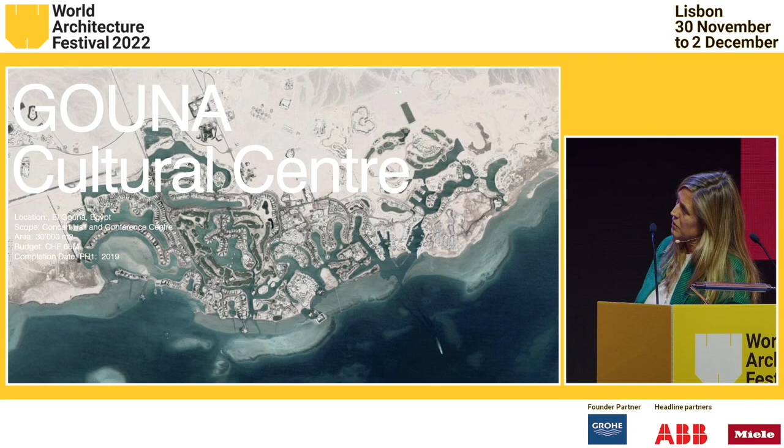El Gouna was the same client, develops cities rather than buildings. Kindly enough, he gave us another concert hall to do in El Gouna.

We were asked to essentially come up with a brief for a cultural center, but we wanted to do something that would connect all the different Old El Gouna and New El Gouna and all of these different areas, so that people, when they're driving around or walking around or bicycling around, will come by this element and by this cultural element.

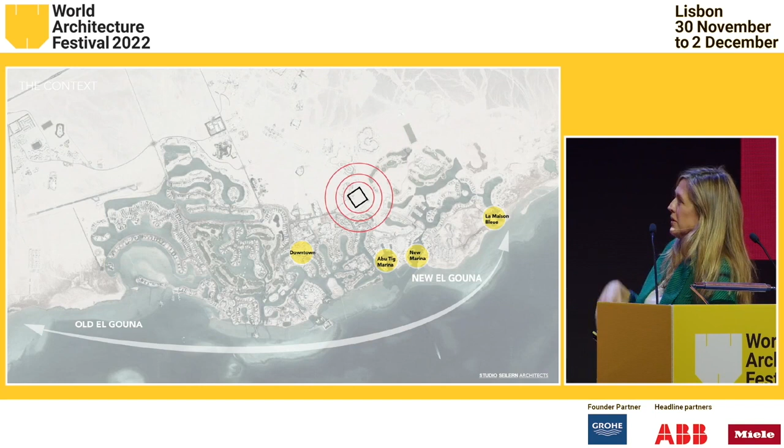We didn't want to come with our Western mentality of this is what a concert hall should look like, and we really wanted to do something that felt uniquely Egyptian and yet was not mimicking Egyptian architecture.

This notion of scale, and the scale of the sculptures and the scale of the colonnades that they have in Luxor is quite something, and we wanted to play with that, and with the simplicity of it all. I mean, if you think of the pyramid, the simplicity of their architecture is something that we played with.

And the other thing that was interesting is that the arch is a Moorish invention, a typology that's been used over the centuries, and it's something, again, that we wanted to play with.

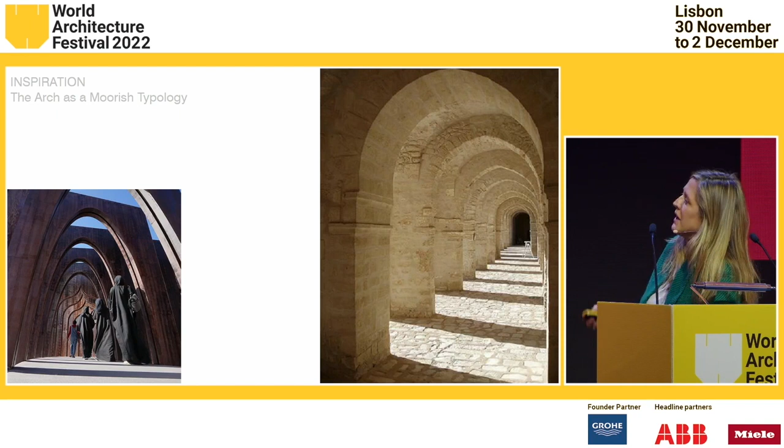We put the building in a 30,000 square meter body of water, which is all gravity fed, so no pumps, because we are in El Gouna, the city of water.

And then essentially we covered the concert hall in yellow, the conference center in blue, and the outdoor film festival area. And then we created these colonnades around the building.

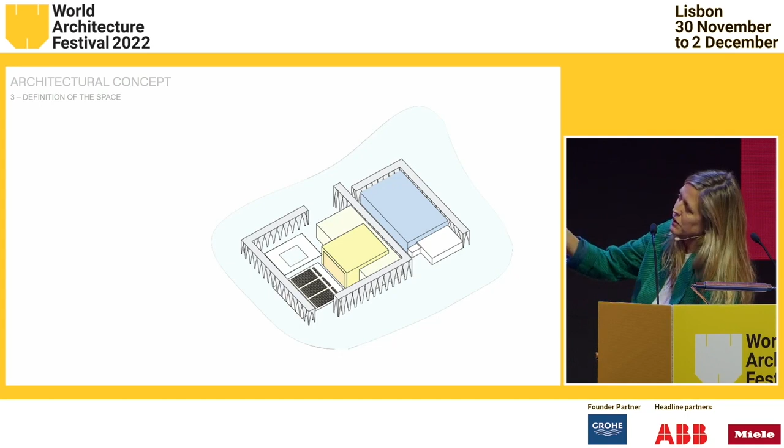And that was simply to create two things: to create sunshade and protect the buildings from the strong winds of El Gouna, but also to be able to build this in three different phases. Phase 1 being the colonnade, phase 2 being the concert hall, and phase 3 being the conference center.

But there's this idea that it becomes a public square that can be used all the time, for festivals and outside for weddings, for you name it. So it had to be something that was usable and flexible and also have the high values of culture and music.

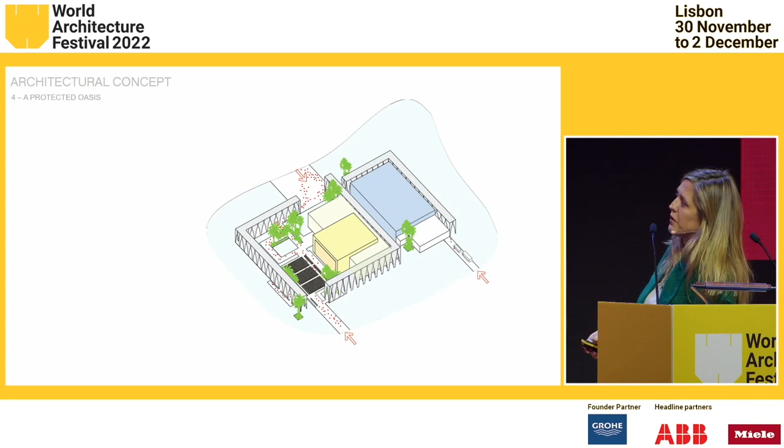We were appointed in January and had to complete phase 1 by September, so it was incredibly quick. We had to design the concert hall, the conference center, and the colonnades all and build it at the same time. But we thought, how can we reinvent the colonnade?

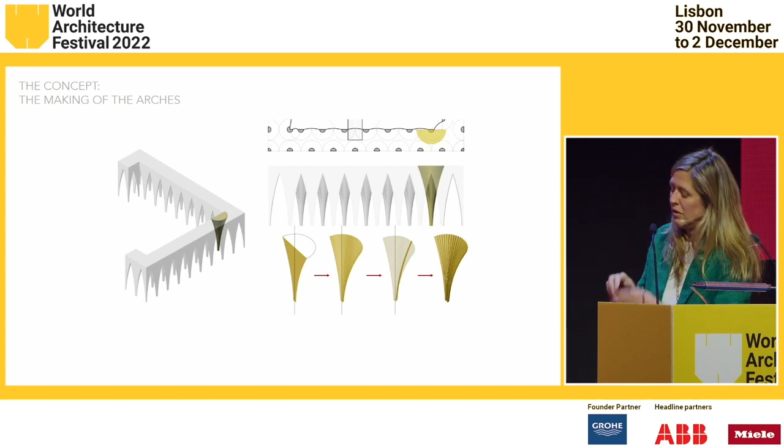And what we did is a very simple move of taking columns and just staggering them and then arranging them to find a new typology for these arches.

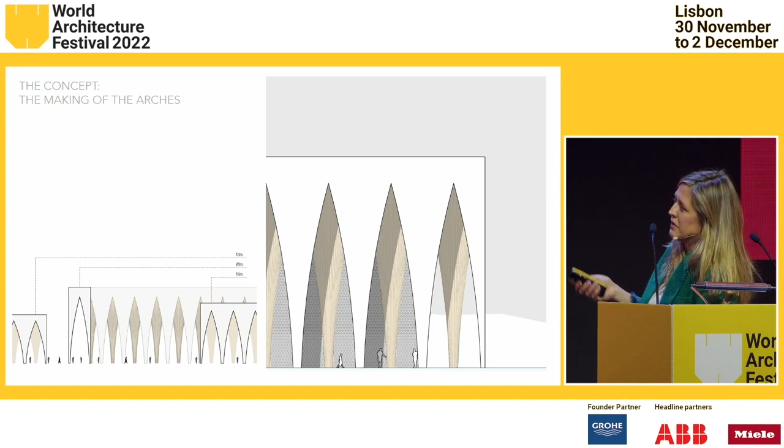And then we played with the scale, and we played with the scale of Egypt, and we amplified them to 20 meters and 18 meters, etc., giving this sense of a uniquely Egyptian scale.

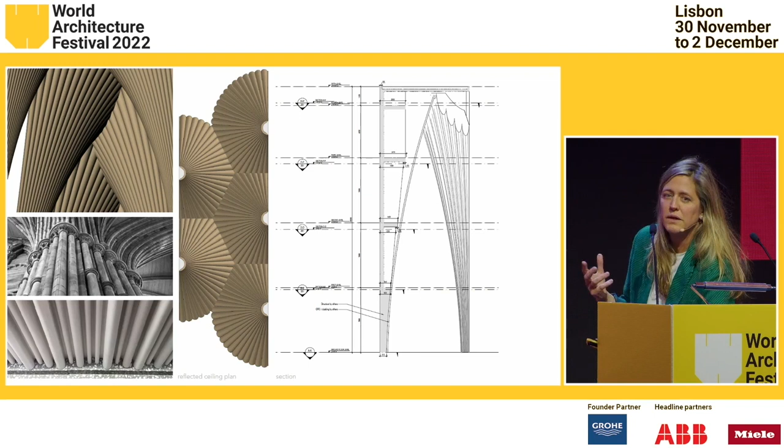But we were also very keen that it shouldn't be too monumental. It should have a softness. It should feel that it comes from the sand, from the area.

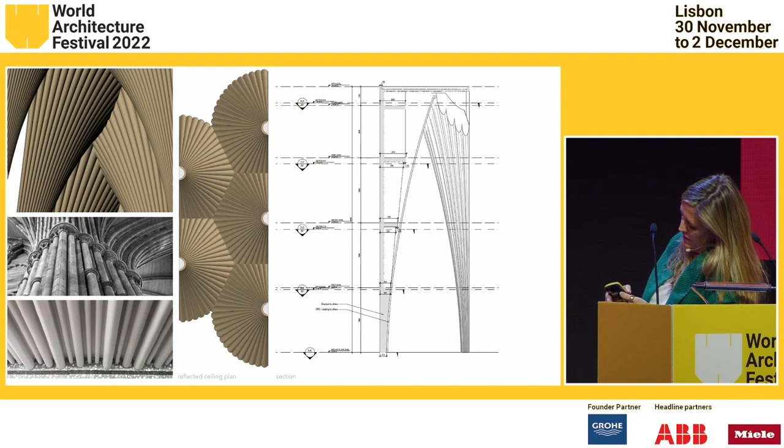And so we created this interior, and you can see in the middle view, once you stagger the arches, it creates a very complex geometry. So we had to come up with geometry that would be able to be built and yet absolutely flawless at the top. You can see how we developed it.

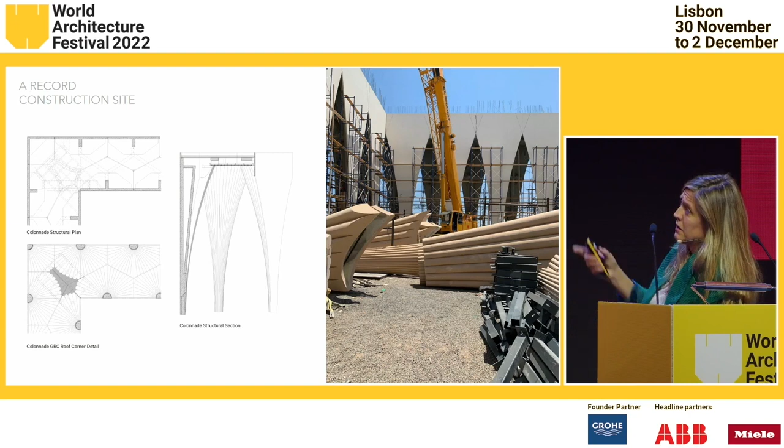This is on site. These are the GRC, glass reinforced concrete panels that we installed. You can see here the scale—that's me next to one of these panels. And they did an absolutely beautiful job of building them with absolute flawless connection in between.

But this softness of sand gives the feeling that you are in, like, a cave in the middle of the desert. This is the plan, with the 30,000 square meter reflecting pool around it.

One of the reasons we chose this site was that it was next to the Nubian village, which is where a lot of the workers live. And actually, I think it's one of the prettiest villages in all of Gouna.

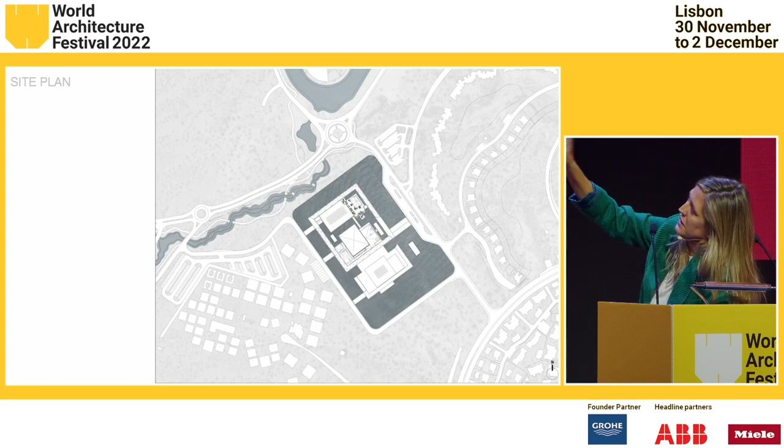More importantly, it was next to this body of water, and we wanted to take the water, flow it through our building, through our plazas, and then reject it again without the use of any kind of pumps, allowing it all to be gravity fed.

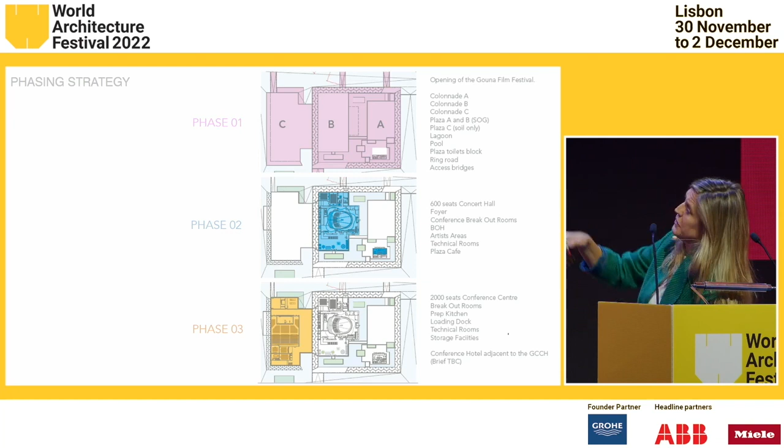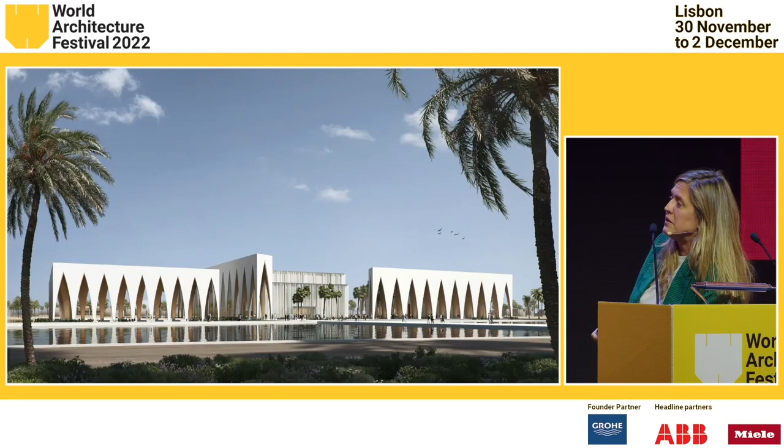These are the 3 phases. You can see phase 1 completed, phase 2 now the concert hall, which I'm going to take you into. We designed the plazas essentially to receive these future buildings, so they can be built easily once they're ready. These are the early renderings.

This is a concert hall building. We were using a local Egyptian stone. They love concrete, and we were trying desperately not to use concrete. We found an Egyptian stone that if we CNC'd it was actually more cost effective than concrete, and that was a great way to be slightly more environmental.

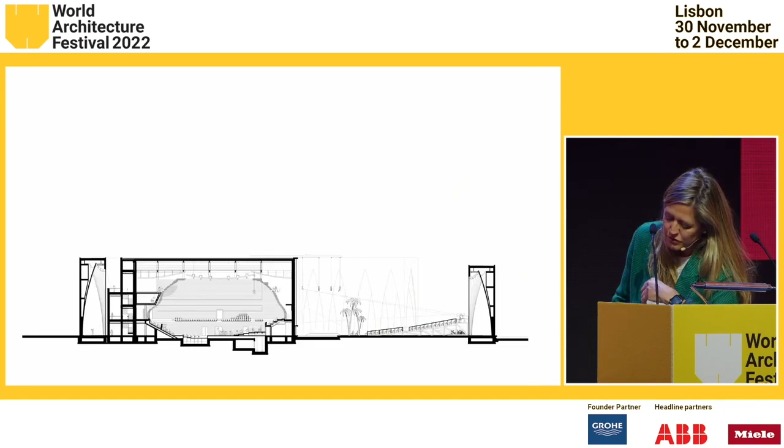Now the concert hall. The concert hall was actually completely opposite elements. The client wanted a 125-piece orchestra so they could play Aida and some big pieces in there, but only an audience of 600. When you have a 125-piece orchestra, you usually have an audience of 2,000 because it just doesn't make sense. So most large concert halls have large audiences.

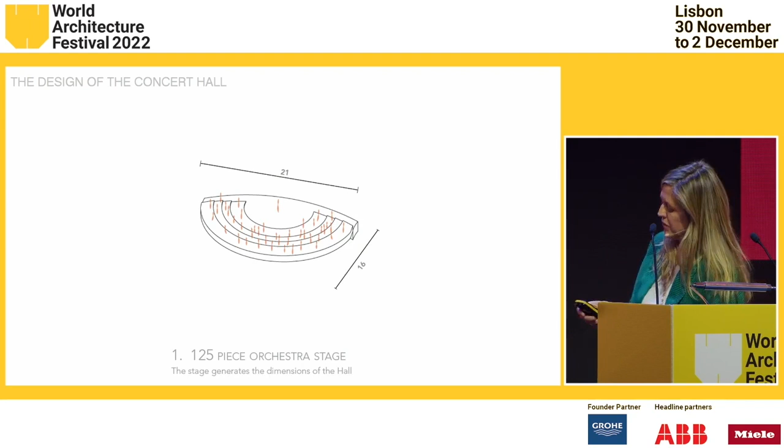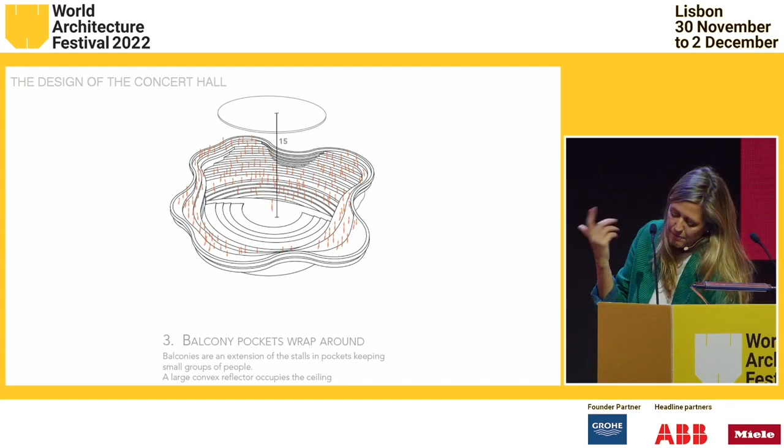So when you design a concert hall, you start with a stage, and you design the stage, and place your instruments, your musicians on it, and you size the stage, then you start building the audience around it. Like Scharoun, and like Andermatt, I wanted to wrap the audience around the orchestra, so you have this very intimate connection. Because 600 is not a big audience, we wanted everybody to see each other and feel part of the same element. Then we put the acoustic reflector above the orchestra, as you need to.

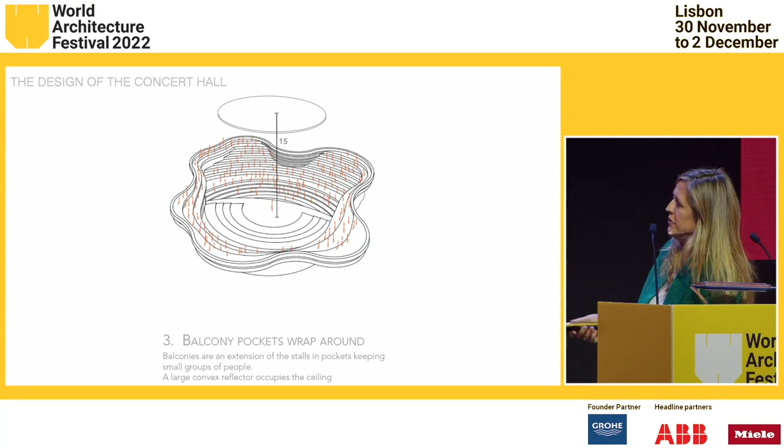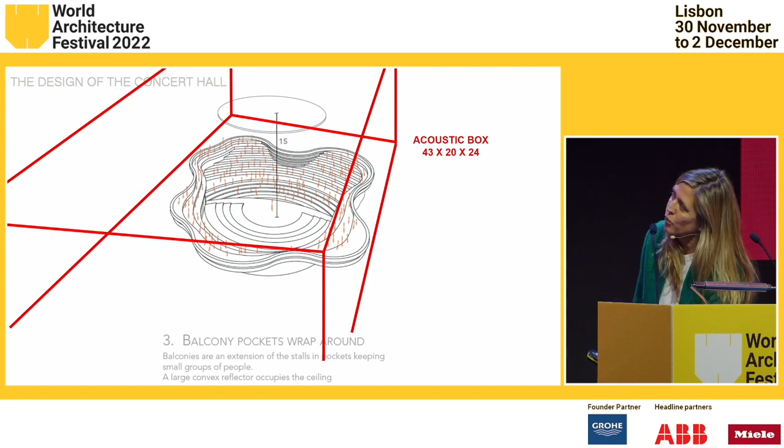The problem was that the acoustic box, the shoe box that worked so well for acoustics, 43 by 20 by 24, would have totally overwhelmed the audience. It would have been like sitting in an IKEA box while this orchestra was going on. So it just didn't feel right.

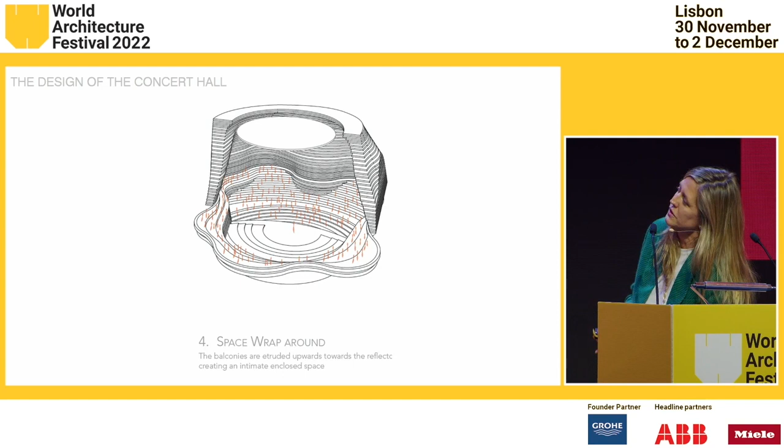So our solution was to create what we call the Intimacy Dome. The Intimacy Dome is completely acoustically transparent but visually solid, and it allows light and sound to go through. More importantly, it compresses the space into a much more intimate space that allows this relationship between the orchestra and the audience to occur without the feeling that you're in this big dark box.

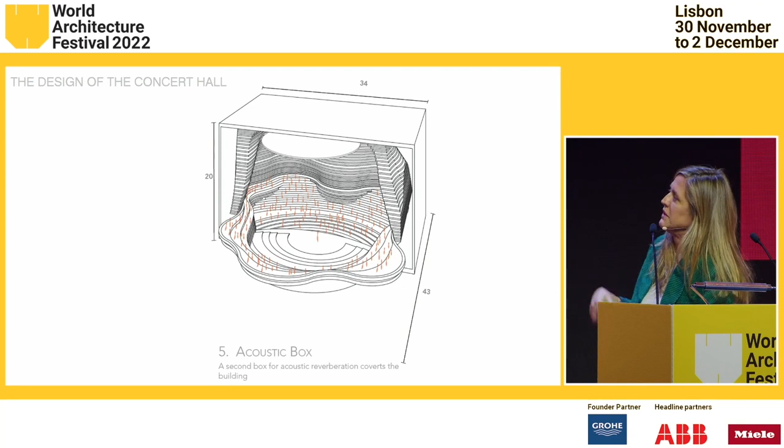Then we place the acoustic box around it, and this is where you put all the speakers and the reflectors and the curtains and all of the things you want for variable acoustics that usually look quite ugly in a concert hall.

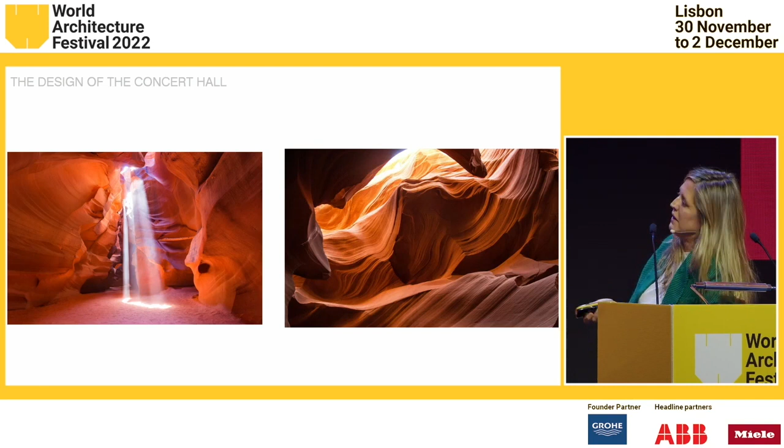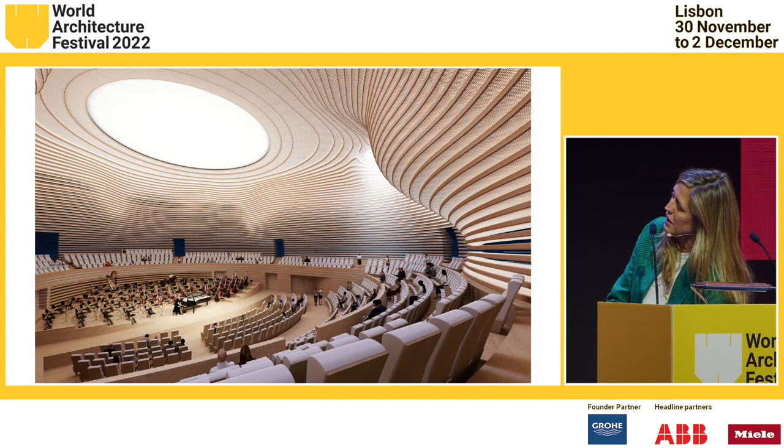This was our very first rendering, where we imagined this idea of being compressed by the space. Obviously it didn't work because we did it out of wood, and the acoustician had a heart attack. But then we moved on and looked at how we could resolve the same idea with a mesh, a transparent mesh, hanging all of this and allowing these shafts of light to come into the space, creating this very intimate relationship between musicians and audience.

And then, as the concert hall gets built, they'll use the other plaza, and eventually the conference center will get built.